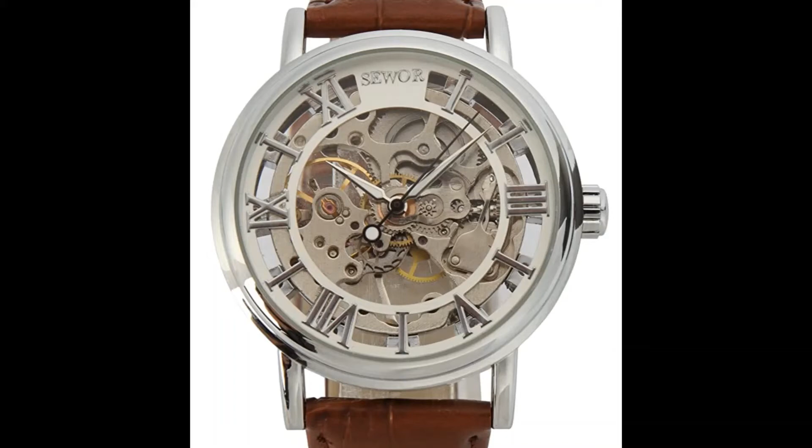Hello, my name is Matthew Day, and I am the team captain of T1A4 Group 4. I am representing my colleagues Gabriel, Braden, Harrison, and Peter.

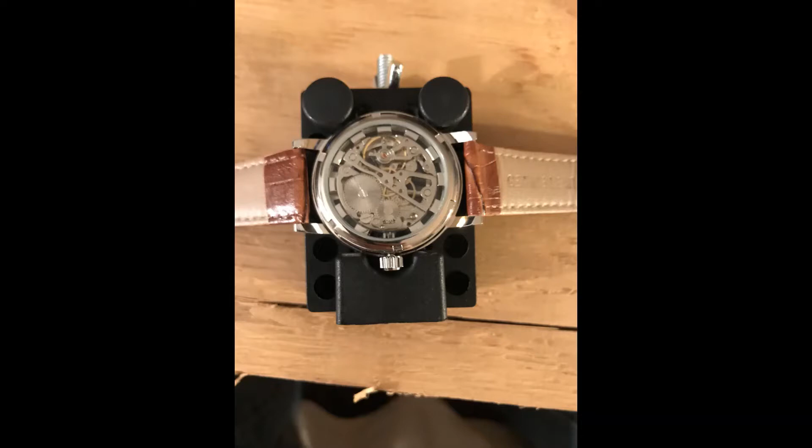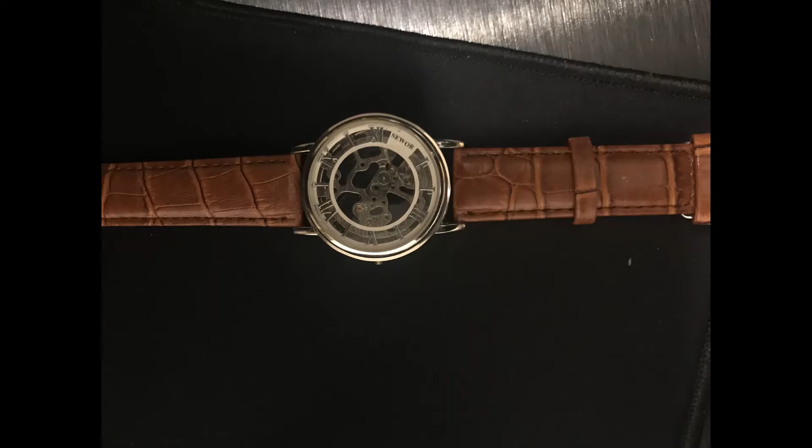As a group, we decided to model a mechanical watch. Unfortunately for us, there are no free and/or acceptable plans for mechanical watches online. The first few weeks of our project, I found this out, and I took it upon myself to buy a cheap mechanical watch off of Amazon. I then took it apart, and then as a team, we worked together to model the parts on Solidworks.

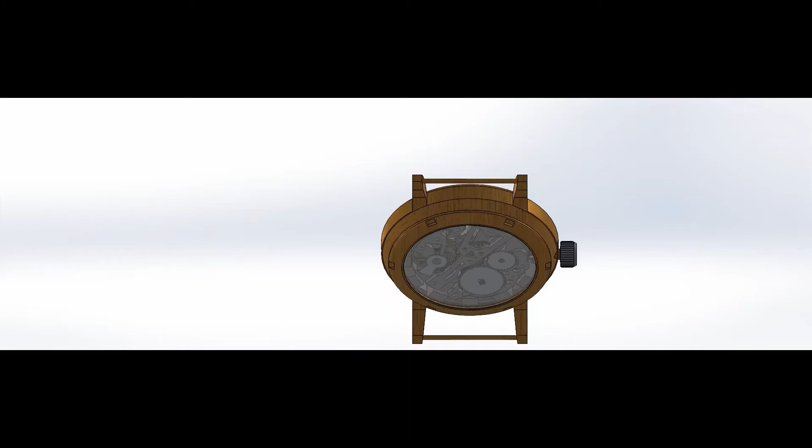We start with the initial watch movement. You can see that by moving the crown, you are able to set the time of the watch. Now, when I was taking apart the watch, I was able to notice that the bottom connects to the top with a screw alignment.

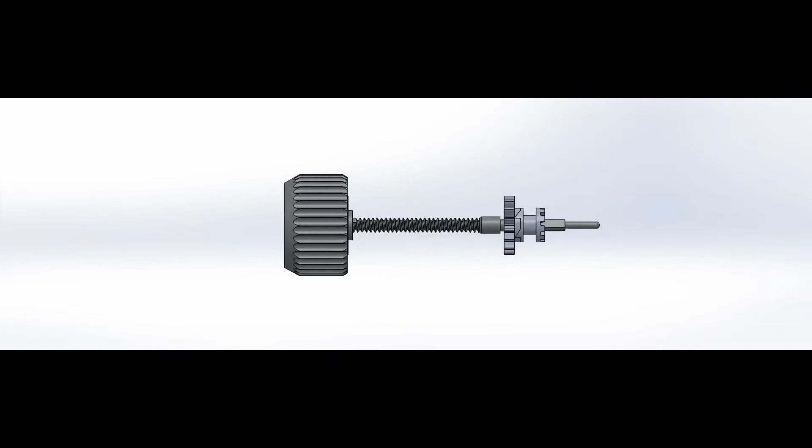We now come to our first subassembly, the crown. The crown is used to set the time of the watch, and it is used to wind the barrel. Notice that the small gear is able to move horizontally.

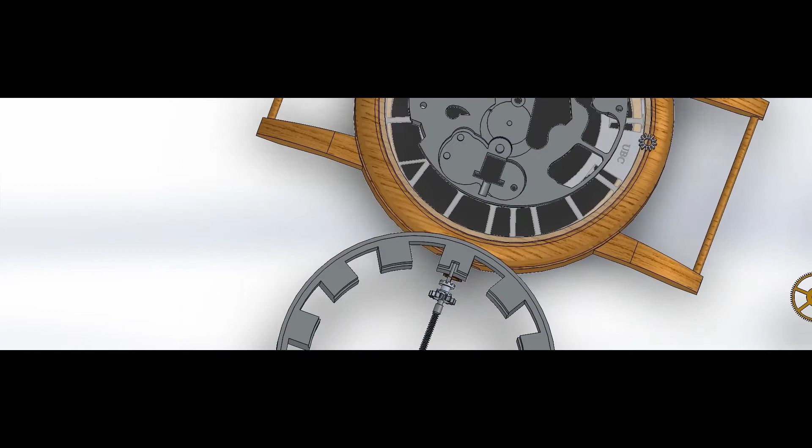You can now see the hand assembly. Each hand relies on their own gear as shown. Through the inner watch movement, the hands are able to move properly.

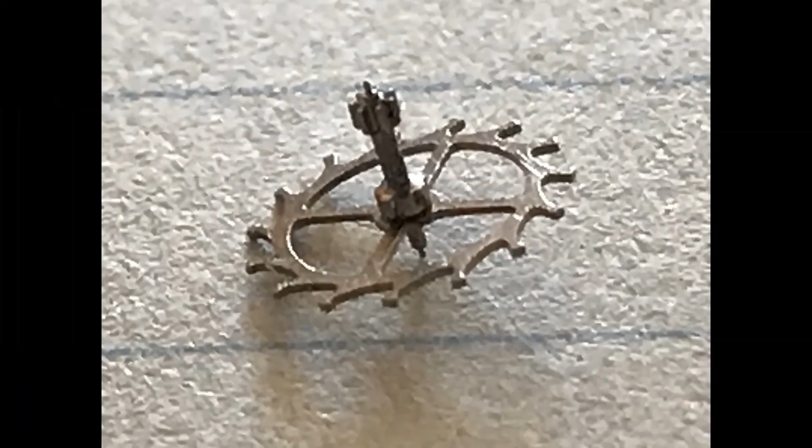The escapement assembly as shown connects with the flywheel, which consistently oscillates, which allows the watch to keep time without messing up, for example, slowing down or speeding up.

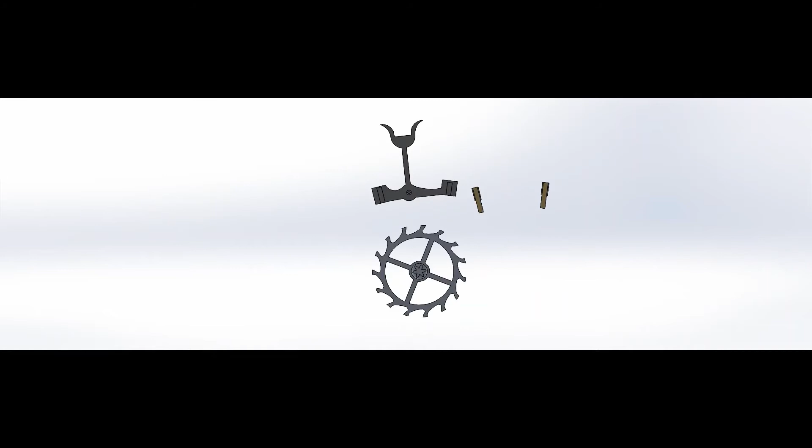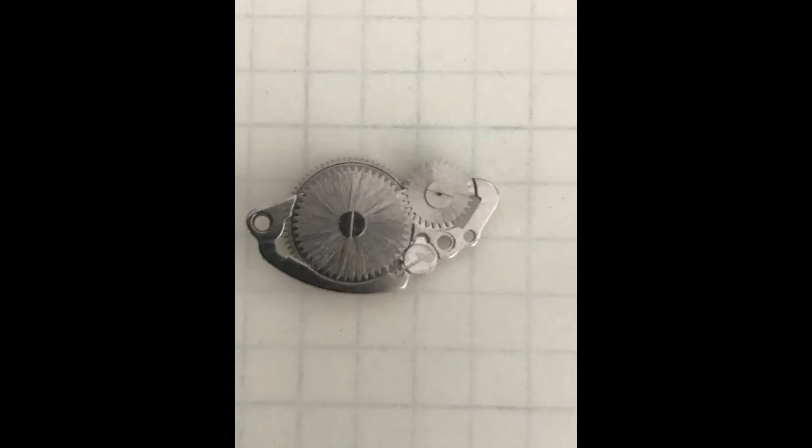Now we are at the plate 1 assembly. The plate 1 assembly connects the crown to the barrel. The barrel, once wound, feeds power to the watch.